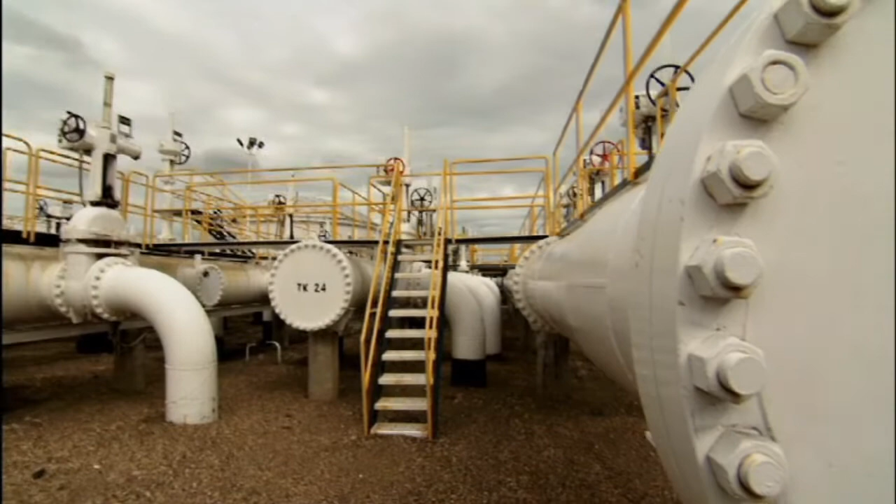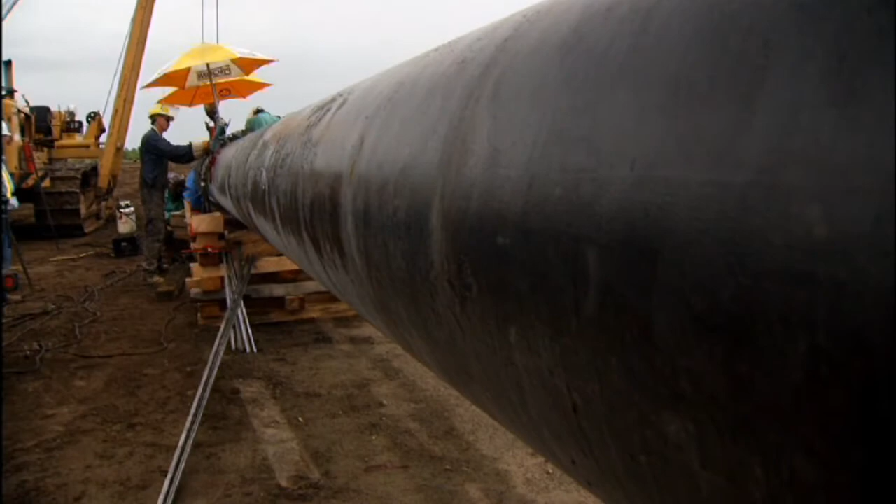Enbridge pipelines move more than 2 million barrels of petroleum products across North America every day. It would take 6,800 tanker trucks or one every 13 seconds to do the same. That fact alone makes a pipeline one of the most efficient, safe, and environmentally responsible energy transportation systems there is. It's why we build them and why we'd like you to know more about them. This program will clarify the process of building, monitoring, and maintaining the pipelines that keep us connected.

It's true that a straight line is the shortest distance between 2 points, but that doesn't always make it the best pipeline route. Open communication is one of our top priorities. Enbridge holds community open houses inviting Aboriginal groups and stakeholders such as landowners and community members to learn more about our pipelines and facilities and talk about route selection. With right-of-way finalized, financial compensation is determined based on market value, construction impact, and a number of other factors. Over the course of a pipeline project, neighboring communities will experience the greatest commercial activity during the construction phase due to the large number of workers required.

A key component to securing the right-of-way is ensuring the chosen pipeline route suits our environmental needs. We have planners that come ahead and environmentalists and biologists and geologists and chemists that come ahead and look at all the potential environmental situations that we could have. And they come up with a solution, and I'm here to make sure that the plan is followed through. Environmental monitoring takes place throughout the pipeline project. It takes a lot of upfront planning because the main aim is to get in and get out with minimal impact to the environment and the landowners.

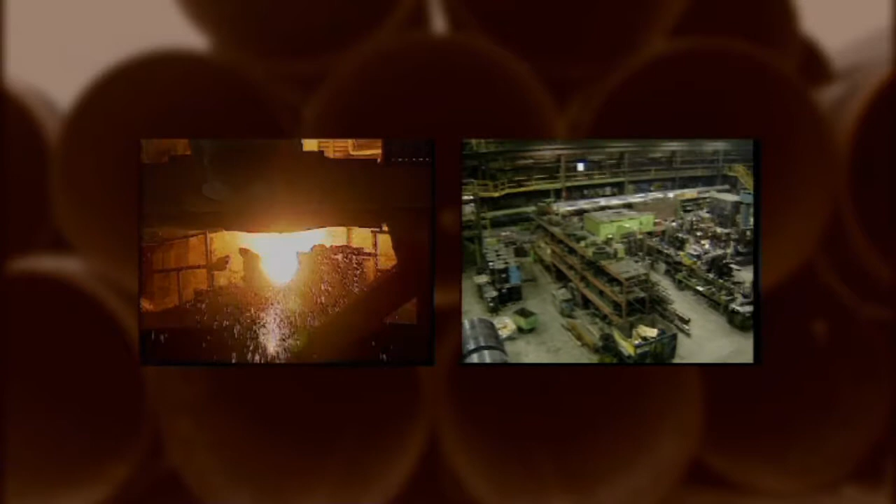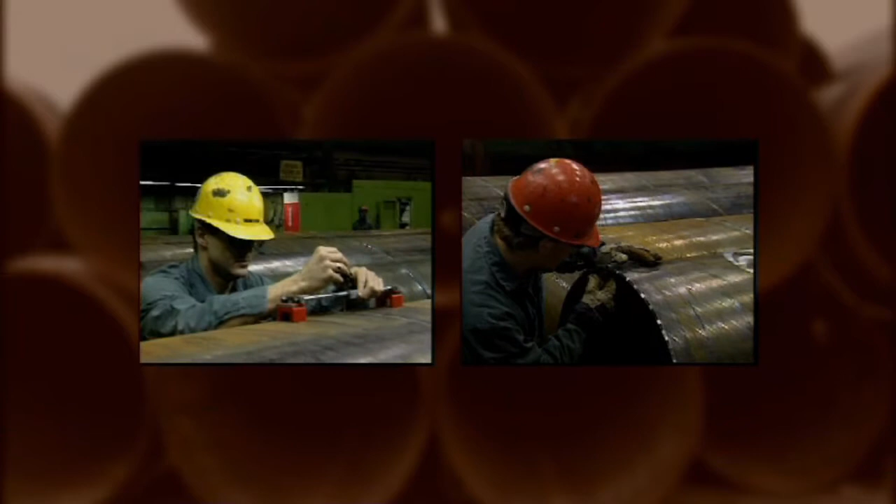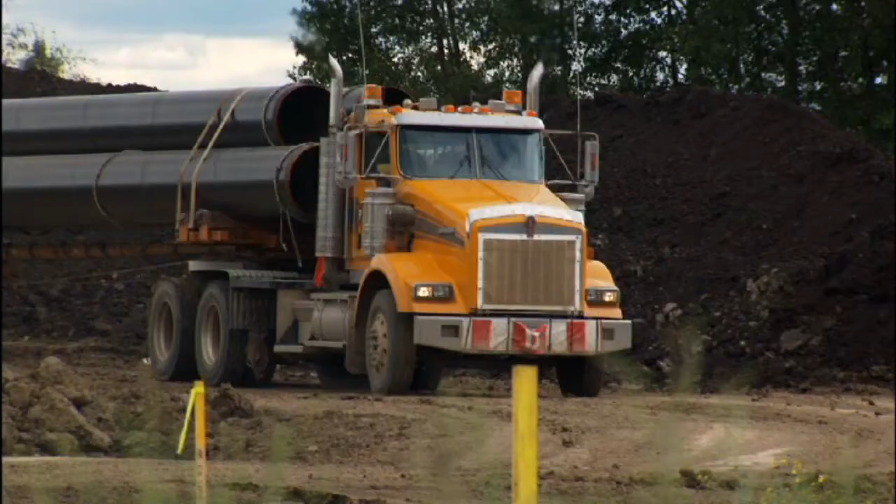A well-maintained pipeline can last indefinitely, and it always starts with quality pipe. Enbridge pipe comes from quality steel pipe production mills like this one. Manufactured to both industry and exacting Enbridge specifications, the pipe undergoes a series of rigorous tests and quality checks. We've got probably the best pipeline in the ground because of the quality control that we've got on it and all the integrity we put into it. Third-party inspection companies ensure the final product is of high quality and meets all dimensional tolerance requirements. Well, because of the pipe you use and the different materials you use, the engineers you have, all the people that put the effort into making this thing happen, you've got a good product. Manufactured, coated, and tested under very strict guidelines, Enbridge pipe is now ready for the line.

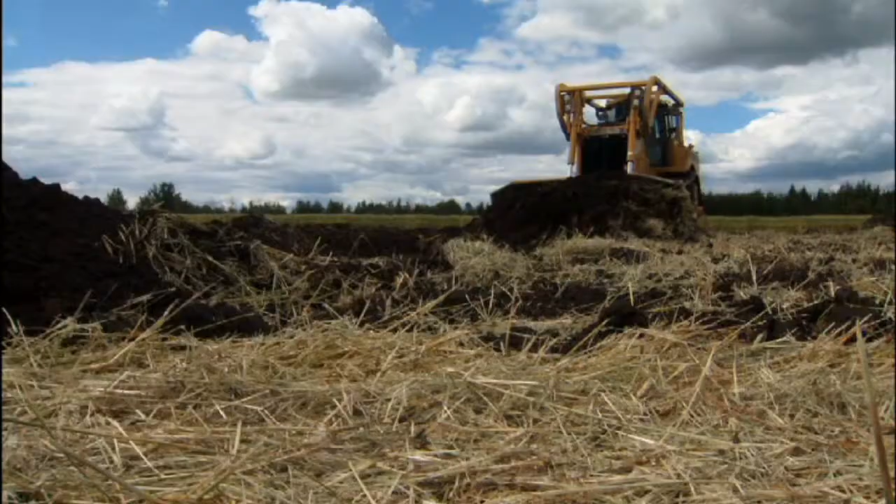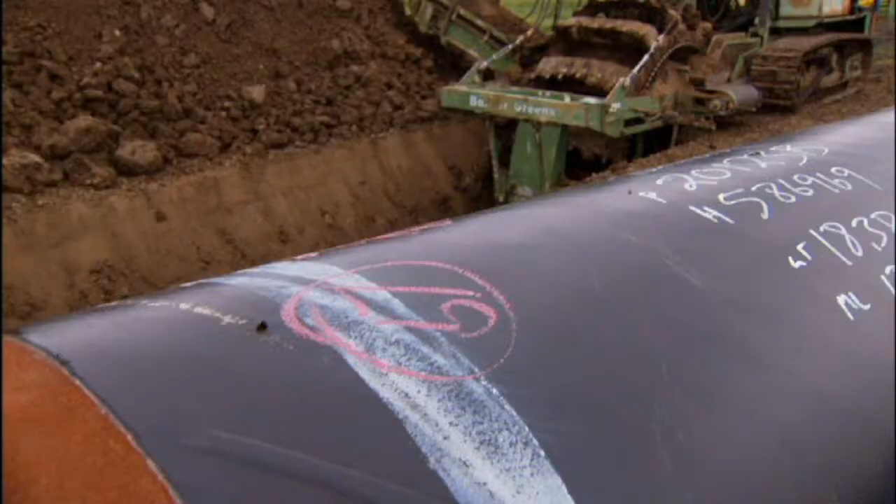With all approvals firmly in place, construction can begin. We're stripping the topsoil and preparing the grade for the ditch crew coming through. Emphasis is on conservation and salvage of the topsoil. After it's graded and accessible, pipe crews lay sections of pipe along the edge of the right-of-way. With quality pipe ready on site, construction crews dig the trench. And where terrain and route plans demand it, a hydraulic bending machine bends the pipe to follow the route and fit the contours of the land.

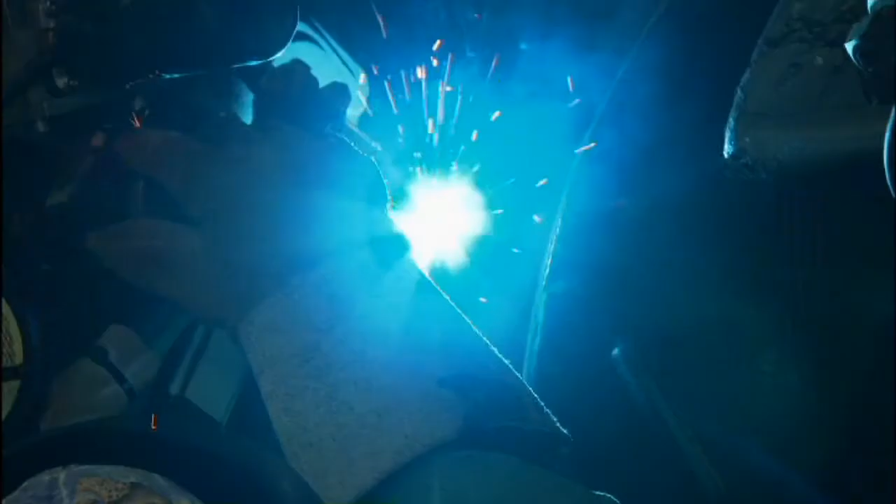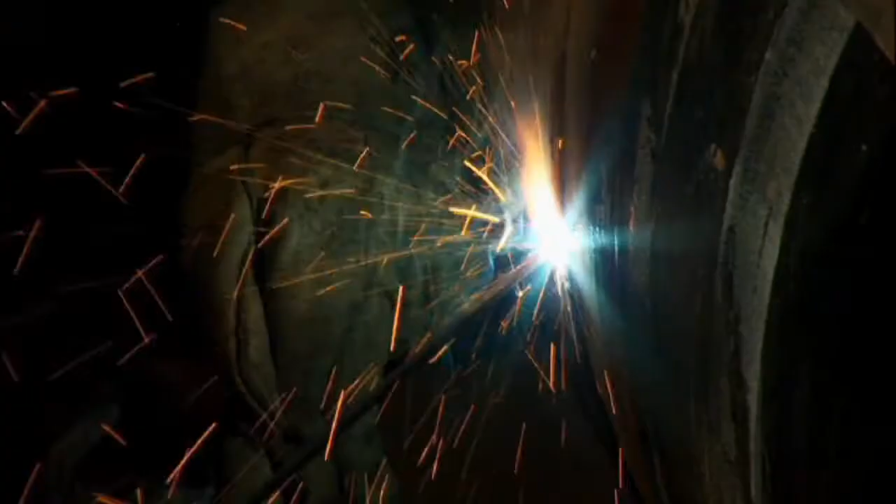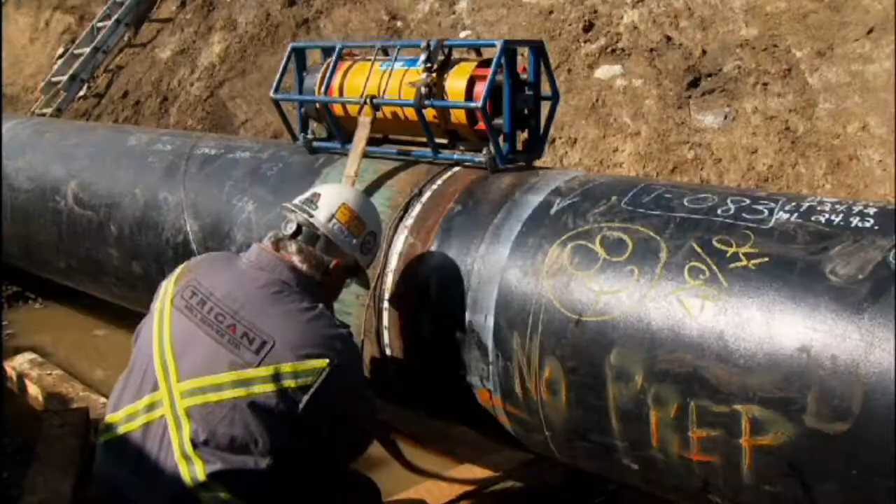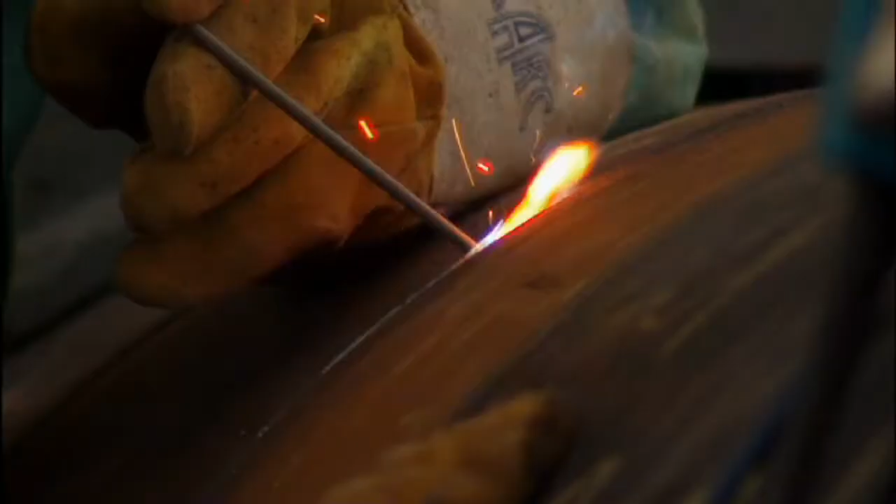We connect more than 40 segments of pipe to build each kilometer of pipeline. And in order to safely deliver the product to the customers, that line needs to be one seamless pipe. So the welding obviously is very important. Welding the pipeline pipe is very exacting and can be done manually and by using automated welding techniques. Weld and test, and test and test. Each weld is inspected using X-ray. Our reason for X-raying is to make sure that there's quality product in the ground. Or ultrasonic inspection methods. When you heat up steel, it changes the metallurgical structure of it, so you have to maintain certain criteria so that all fits together as pipe, so it all becomes one.

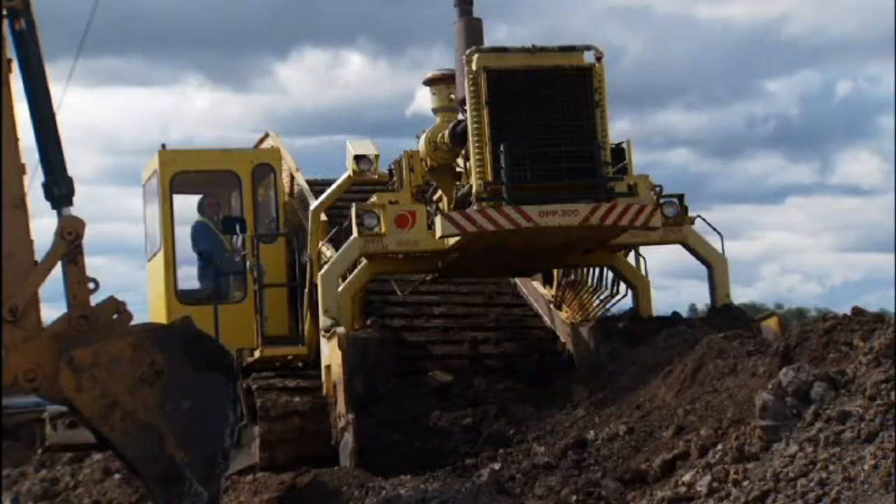And following inspection, specially designed cranes lower the long sections of welded pipe. The pipe is all welded up and on the skids. When I come along, I lower it into the ditch, and then the backfill crew finishes it off by covering up. Subsoils are then replaced and packed. We're putting the padding on there so it protects the pipe. And then topsoil is replaced. The fields are left the way they were when we got in here. But before completely restoring the right-of-way, the pipeline is first pressure tested with water. The pressure test that we do on the lines is higher than the operating pressure that the line will be in. We've got to do it right the first time because it makes it a lot harder if you've got to do it over again.

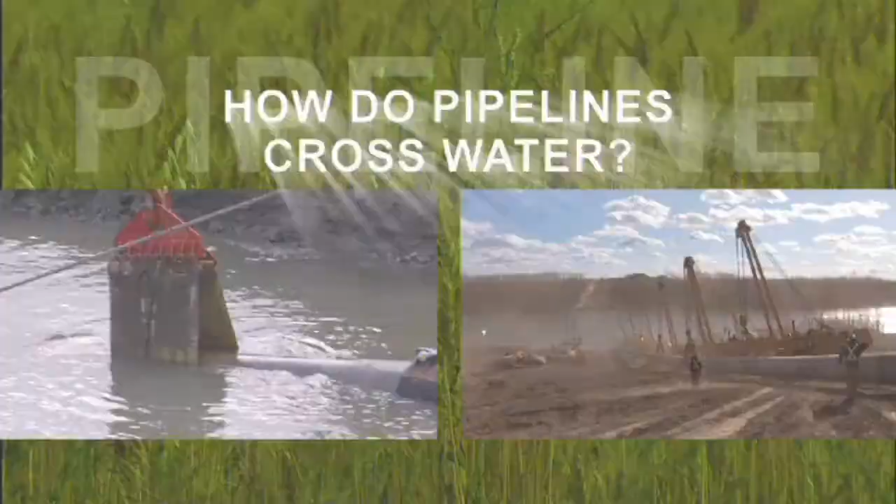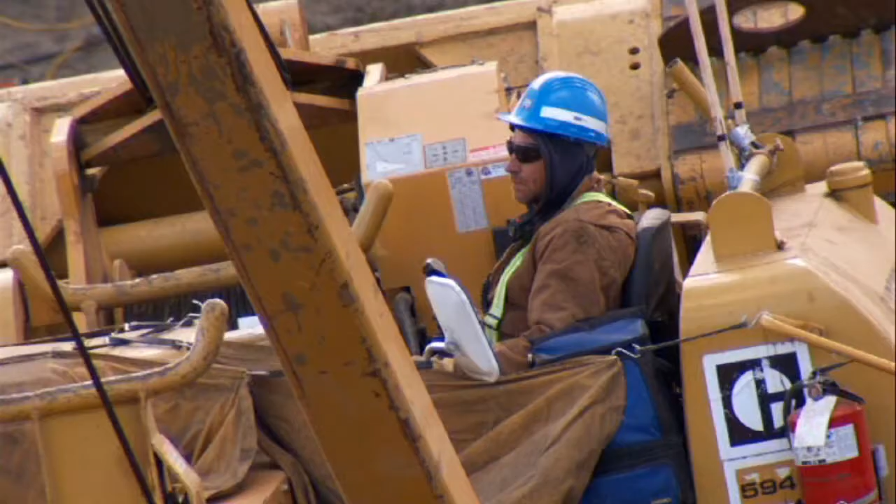Before crossing rivers or large bodies of water, Enbridge consults with all stakeholders, including environmental, engineering, and regulatory bodies, to determine the best crossing technique. We've got a number of governing agencies that give permits for this type of work with a lot of conditions, and all the conditions are met meticulously.

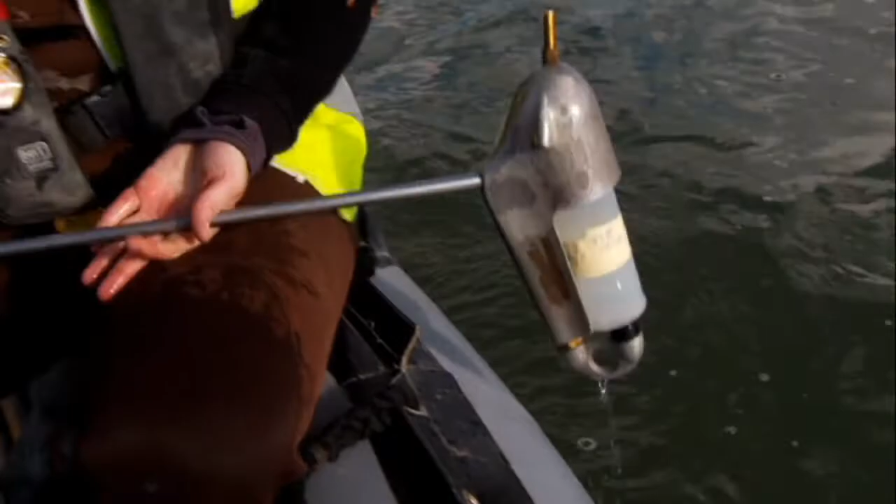And in every water crossing case, Enbridge further minimizes environmental impact with exhaustive environmental assessments of fish and aquatic habitat. It involves sampling water and measuring sediments and providing feedback to construction crews. It's very proactive. It does protect the environment.

Once pipeline construction is completed, the right-of-way is restored to meet landowner agreements and regulatory agency requirements. They're good people to deal with. They are concerned about the land, and they will compensate you if there's any problems.

Because they're rebuilt to exacting standards, pipeline right-of-ways can usually be used as they were prior to construction. With the majority of the landowners, they are impressed and everybody is satisfied when the job is done. Other facilities like fences or paths can also be approved for use on pipeline right-of-ways through contact with Enbridge.

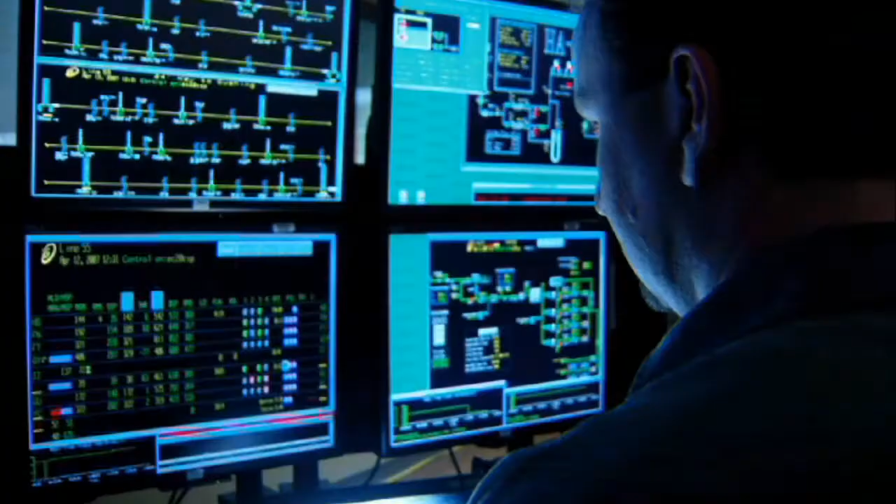We monitor the pipelines across North America. We watch the pressures and regulate the flow rates. Effective monitoring means continuous feedback, and with our Supervisory Control and Data Acquisition, or SCADA computer system, we continuously monitor all of our pipelines from this high-tech operations center. It allows us to run all our field facilities through the one room, so everything thousands of miles away we can monitor and control through here.

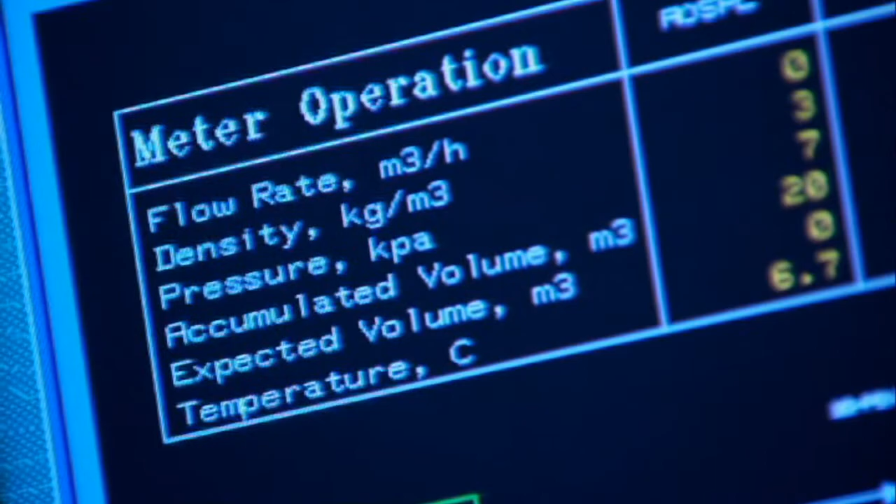SCADA is a constantly upgraded monitoring system that sets the industry standard. It's state-of-the-art. It's probably the best in the world. Our operators are the most trained in the world. We also train other operators for other companies.

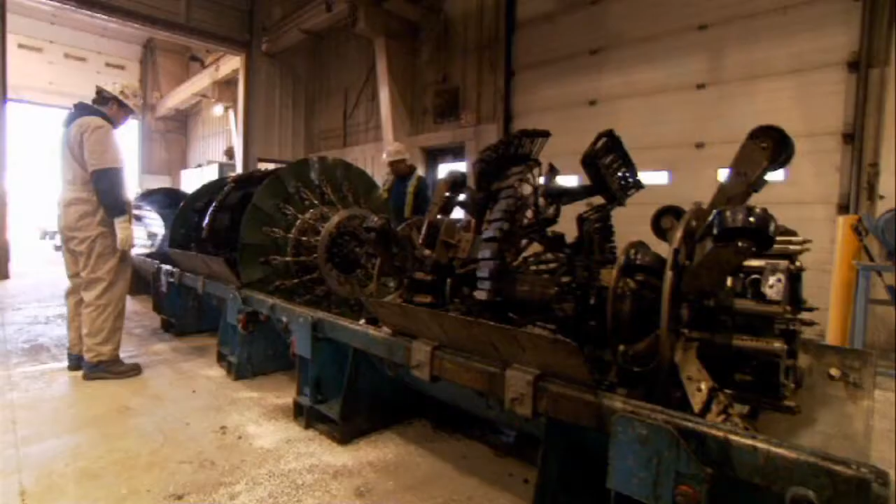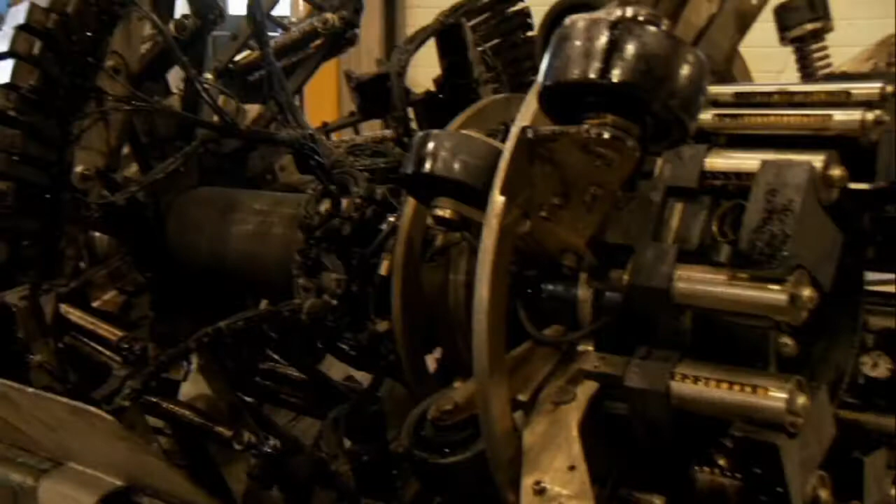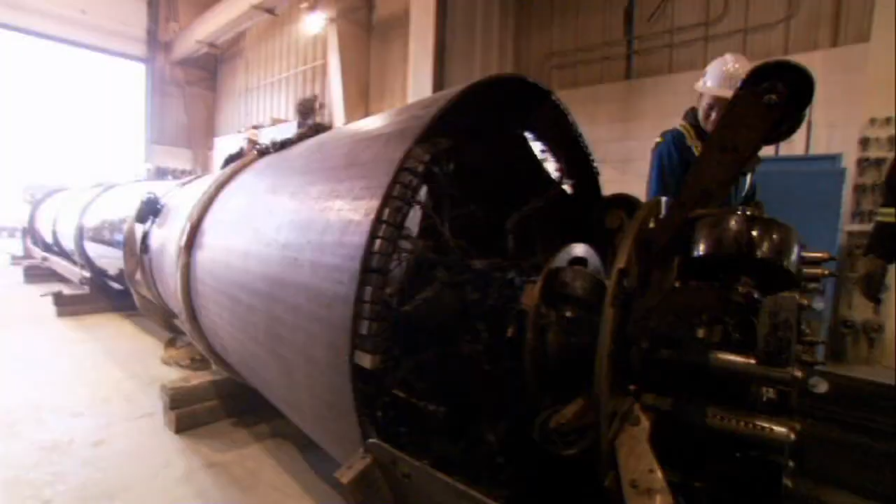From its beginning, Enbridge has invested heavily in the safety of our pipelines. That includes pipeline monitoring, integrity management, and measurement. And to do that, Enbridge relies on expert field technicians and the best inline inspection tools on the market. These high-tech tools are used to detect even the most minute changes in the pipe. By mastering the latest ultrasonic and electromagnetic technologies, Enbridge has become an inline inspection leader among transmission pipeline companies worldwide.

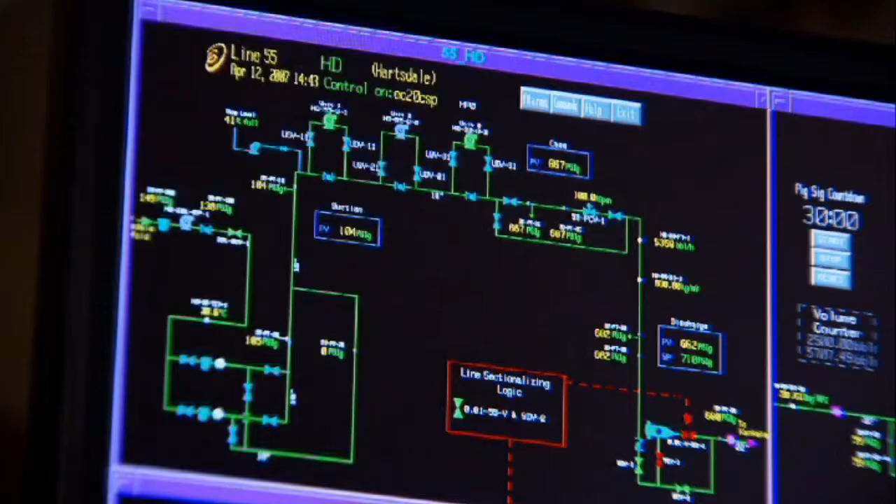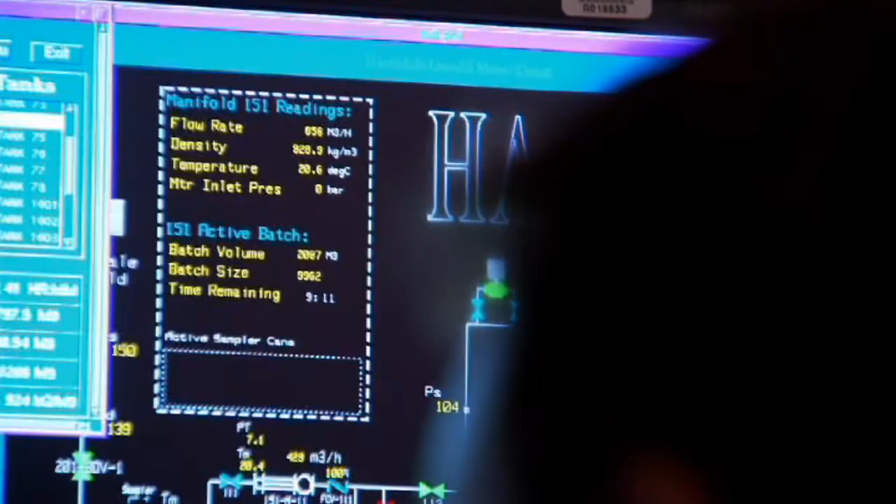We need to know exactly what's happening out in the field, precisely when it happens, immediately, so we can respond and react to it appropriately. The best leak detection system is a real-time leak detection system. That's why Enbridge created one. It's called the Materials Balance System, and it takes data from strategically located meters and sensors and calculates the volume of liquid hydrocarbons in the pipeline system. If irregularities are detected, an alarm immediately sounds.

A key part of ongoing pipeline safety is prevention. By air and by land, Enbridge surveys every pipeline route regularly to help detect and avoid pipeline damaging activities. We're looking for leaks. We're looking for people that are digging on the right-of-way that shouldn't be there. We're looking for the general condition of the right-of-way.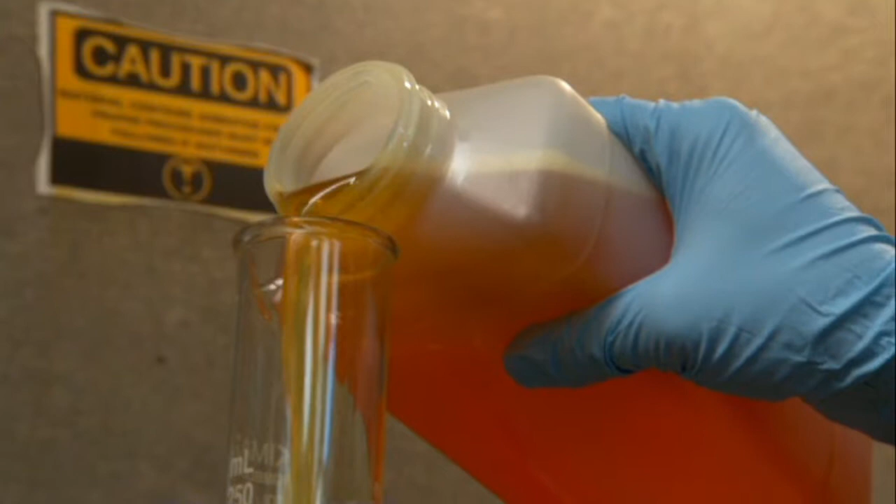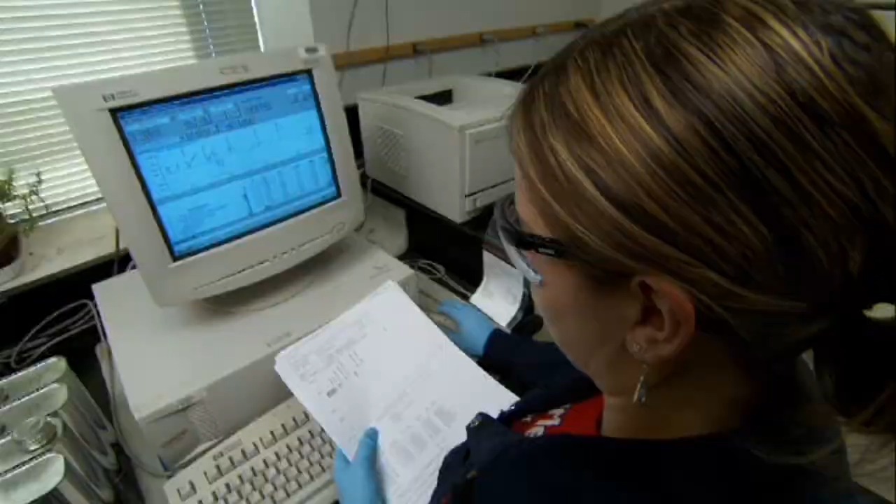At Enbridge, we believe in proactive prevention. That's why we routinely analyze the liquids we transport. If corrosion elements are present, anti-corrosive chemical treatments are injected into the pipeline. The purpose of the testing here in the lab is to maintain quality of the samples, which in turn helps maintain the quality of the pipelines.

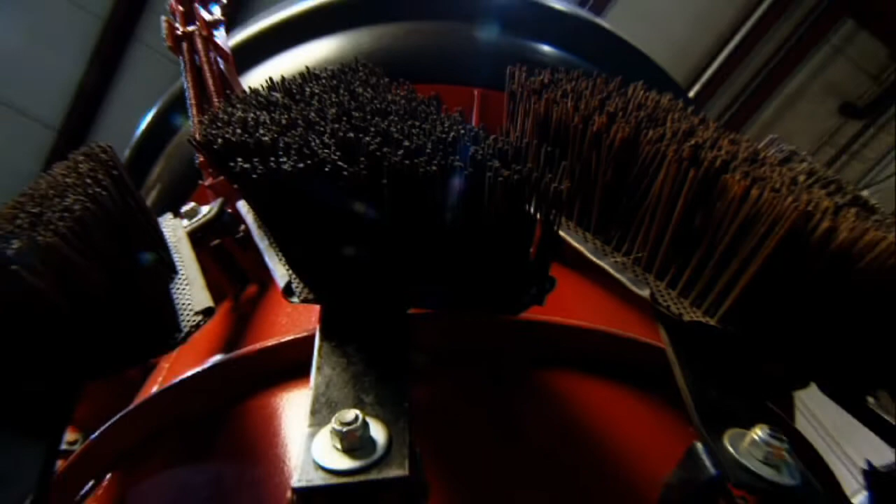We also periodically flush and/or clean out pipelines that are not under continuous flow to make sure internal corrosion doesn't become an issue. This is a 48-inch cleaning tool, a cleaning pig, what we call them here. And they actually are a tight-fitting tool which cleans the inside of a pipeline.

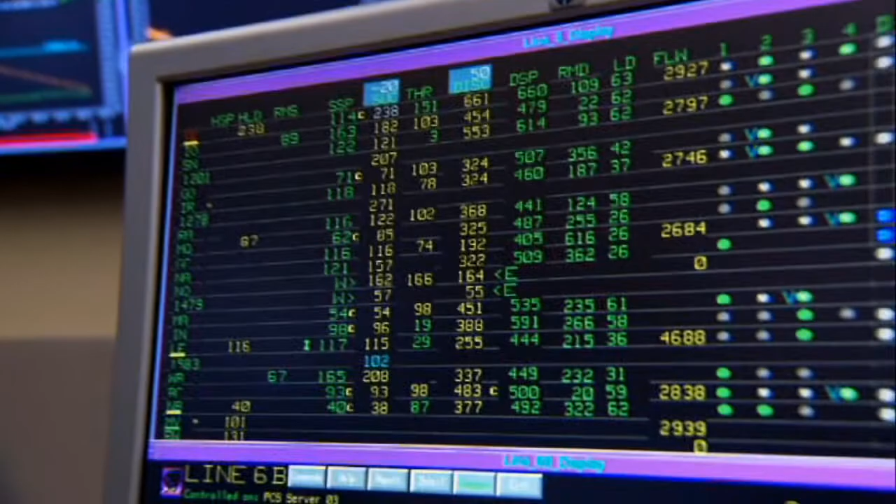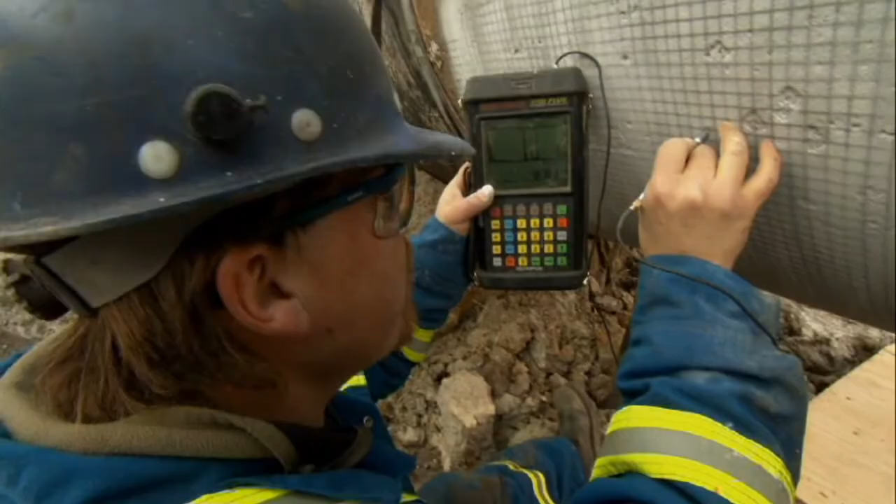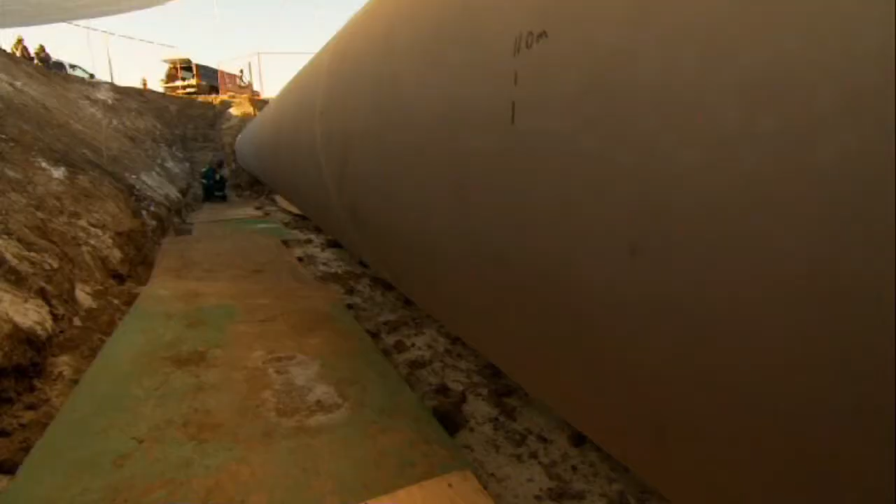Inspection of the pipeline using advanced inspection tools provides Enbridge with the data it needs to determine which section of pipeline may need repair. When it does, we excavate, evaluate, repair, complete with a new protective coating, and replace. Usually what we'll do is we'll sleeve it. And it's just like two halves of a pipe that actually fit over top of the pipe that we have in the hole. And then it's welded on the sides and around the ends. A full pipe replacement is seldom necessary.

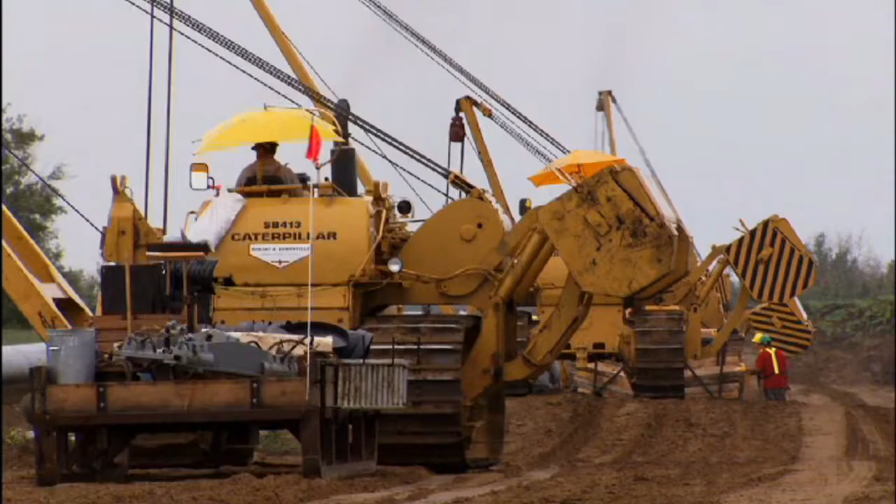Pipelines. From building and testing to monitoring and maintaining. When you know how they work, it's clear that pipelines are one of the safest, most efficient energy transport systems, keeping us all connected.